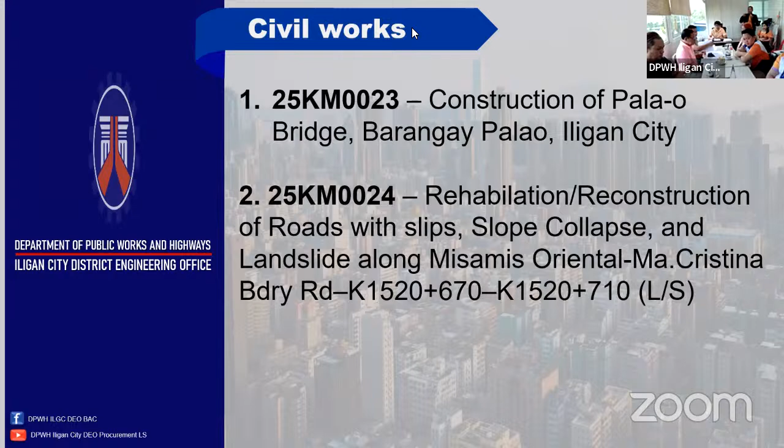Now, we will discuss the eligibility requirements, financial and technical. Sir Muammar, please. Yes. Okay, good morning. Let's review the eligibility requirements: Class A documents, legal documents. Technical documents: statement of all ongoing and similar completed government and private contracts, valid PCAB license and registration for the type and cost of the contract to bid, construction safety and health program, statement of single largest completed contract.

First, a contract shall be considered similar to the contract to be bid if it has the same major categories of work. Please refer to Department Order number 117, series of 2017, revised guidelines for the determination of major and similar categories of work.

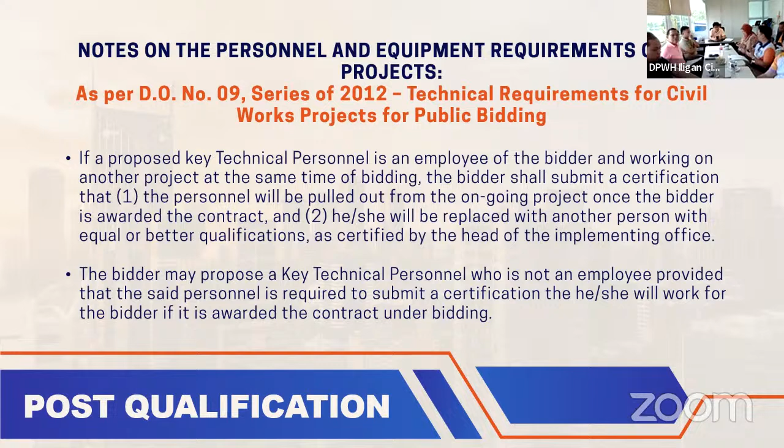This certificate shall be included in the first envelope of the sealed bid. Also to be verified during post-qualification is the said equipment pledged by the bidder. The bidder should specify in the submitted bid the location of the equipment where they can be inspected. If any equipment is not in the specified location, then the bidder shall be post-disqualified.

Contract award. The contract shall be awarded to the bidder whose bid has been determined to be the lowest calculated and responsive bid as a result of the detailed evaluation and post-qualification conducted. The successful bidder shall be notified through the issuance of notice of award within the bid validity period and must be confirmed by the successful bidder in writing within 2 days upon receipt thereof.

Some common errors in the submission of bids. First, incomplete pages of bid documents, technical and financial. Second, authority of the signatory to sign on behalf of the bidder. Single proprietor: signatory should be the owner proprietor only. Corporation or cooperative: board secretary certificate and board resolution. For the joint venture: resolution or agreement. For the partnership: as indicated in the articles of partnership.

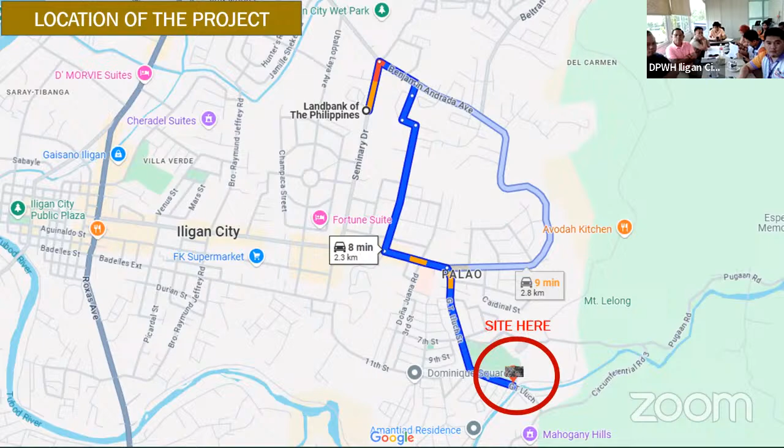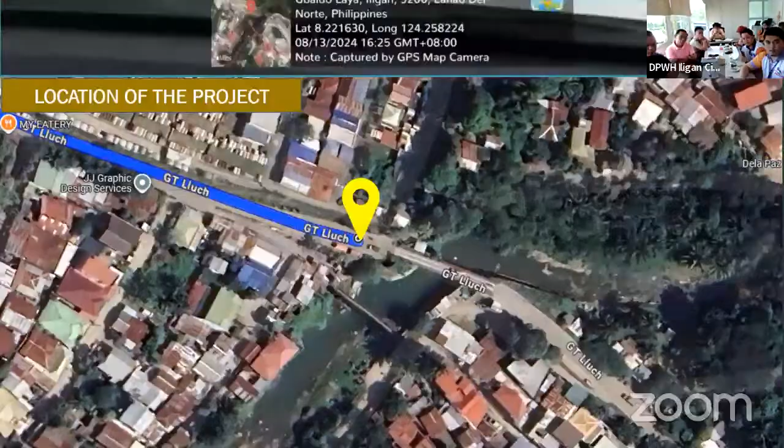As for the project description, the project involves construction of one span PSCG bridge with RC pile driven foundation. The length will be 40 meters. The project duration is 289 calendar days. The project also includes provision of field office for the engineer, rental basis. For the scope of works, under Part A, facilities for the engineer, we have provision of field office for the engineer, rental basis. For Part B, other general requirements, we have project billboard / signboard and another project billboard / signboard. These two items have different sizes, that's why they are separated.

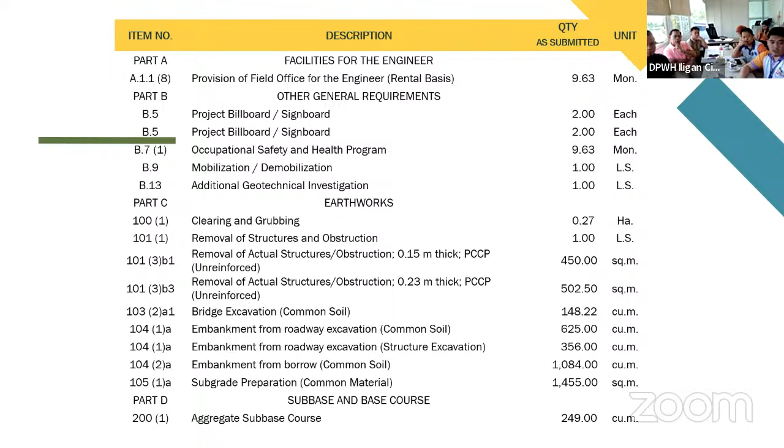And for Part E, we have surface course. First is Portland cement concrete pavement, unreinforced, 0.15 meters thick, 14 days. We also have Portland cement concrete pavement, unreinforced, 0.28 meters thick, 14 days.

For Part F, bridge construction, we have precast concrete piles furnished, 450 by 450 mm, type C. Precast concrete piles driven. Test piles furnished and driven, 450 by 450 mm. Concrete railing, standard. Reinforcing steel grade 40. Reinforcing steel grade 60. Structural concrete class A, 27.58 MPa, 28 days.

Pre-stressed structural concrete members, type 6 I-girders, lean concrete class B 16.5 MPa, paint for concrete structures, elastomeric bearing pads, expansion joint, steel finger type. Then for Part G, drainage and slope protection structures, stone masonry. For Part H, miscellaneous structures, we have reflectorized thermoplastic pavement markings, white, and reflectorized thermoplastic pavement markings, yellow.

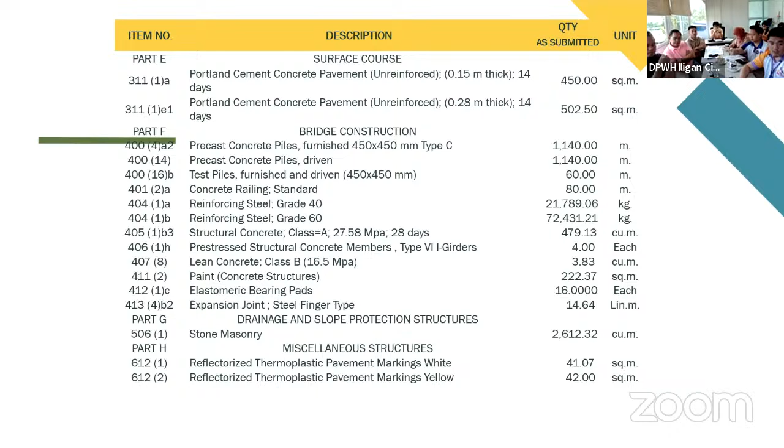And now for the minimum equipment requirements. First, we have dump truck, payloader, bulldozer DX175, horsepower of 167, backhoe with breaker, 0.80 cubic meter, chainsaw, 9 inches standard blade, motorized road grader, 140 horsepower, G710A, vibratory roller, 10 metric tons,

SD100DC, water truck / pump, 16,000 liters, transit mixer, concrete vibrator, concrete batching plant, concrete screeder, concrete saw, 14-inch blade diameter, bar cutter single phase, bar cutter 3-phase 36 diameter maximum, joint sealer machine, truck mounted crane with 41 to 45 metric tons, diesel hammer 7,500 kilogram meter,

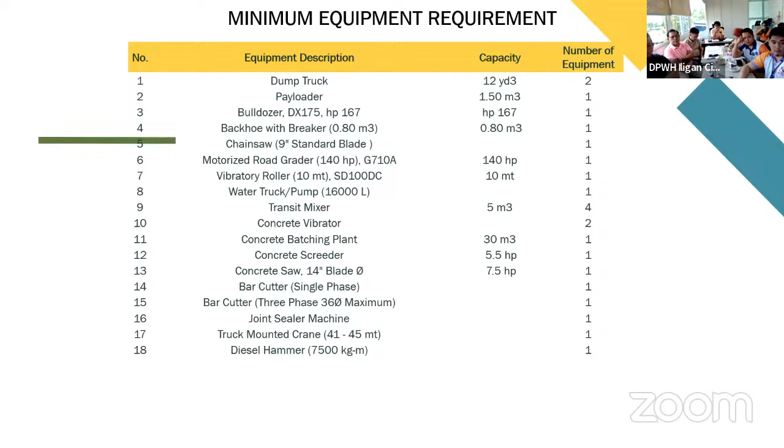and drop hammer, cutting outfit, jackhammer, bar bender, crawler crane with bucket, 1-bagger mixer, wood / steel ladder, cargo / service truck, generator set, welding machine, 500 amperes, electric driven, grouting machine, crawler crane, dolly, backhoe wheel mounted, vibro hammer, water pump, 100 mm suction diameter, cargo / service truck, applicator machine, kneading machine, material testing equipment / apparatus

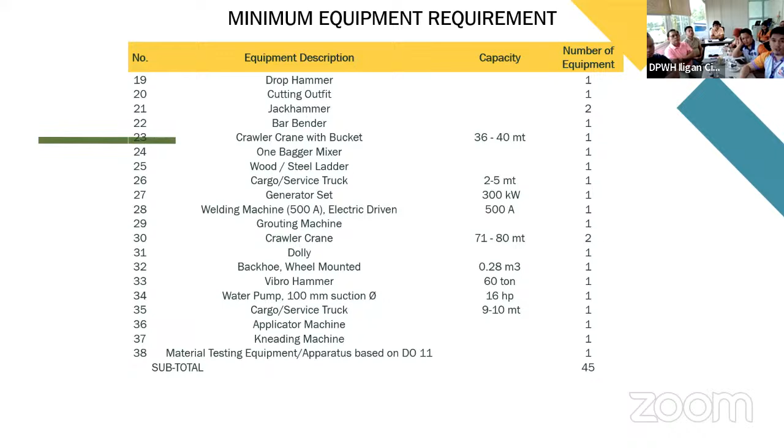based on DO 11, with a subtotal of 45 equipments. This project has an approved budget for the contract of 47,040,000 pesos only.

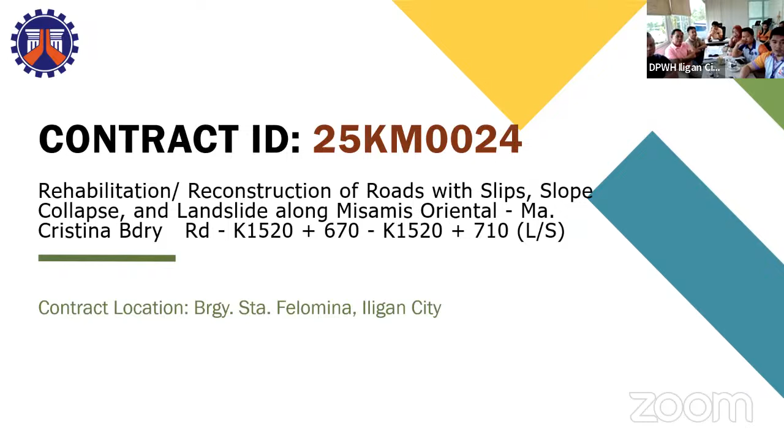For the second contract, with contract ID of 25 KM 0024, entitled Rehabilitation / Reconstruction of Roads with Slips, Slope Collapse, and Landslide along Misamis Oriental-Maria Cristina Bdry Rd, K1520+670 to K1520+710, left side. Contract location is at Barangay Santa Felomina, Iligan City. So this one shows the location of the project, which is roughly 3.9 kilometers from our office.

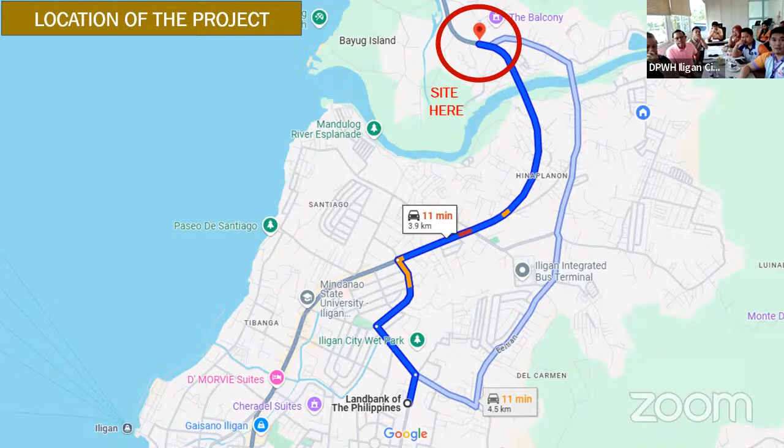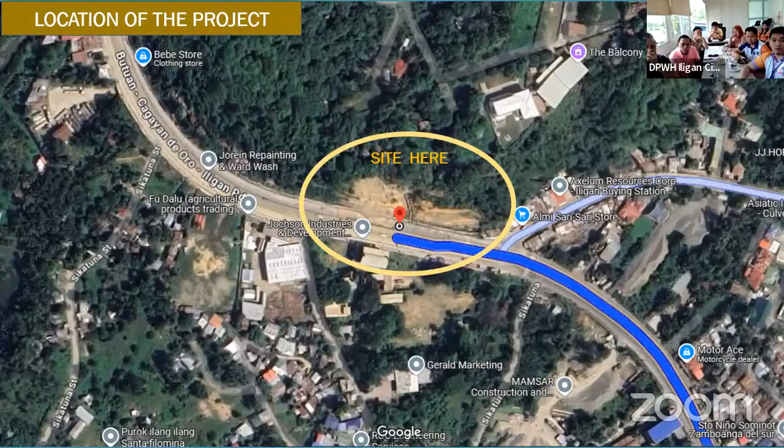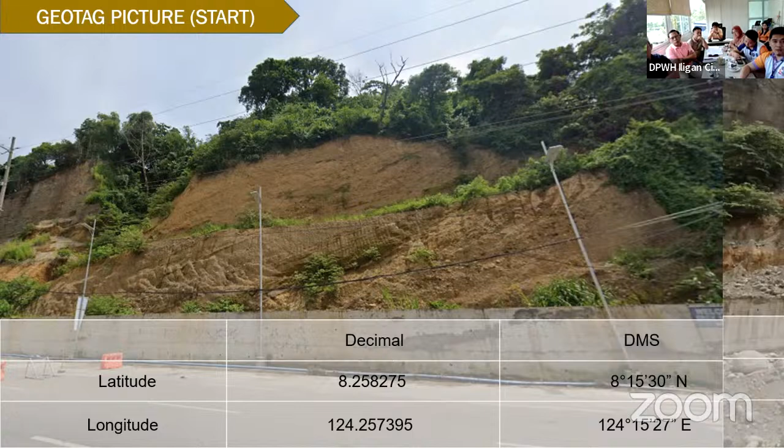And this map shows the closer top view of the site location. This photo is a geotagged picture showing the starting point of the project, while this one shows a geotagged picture of the end point of the project.

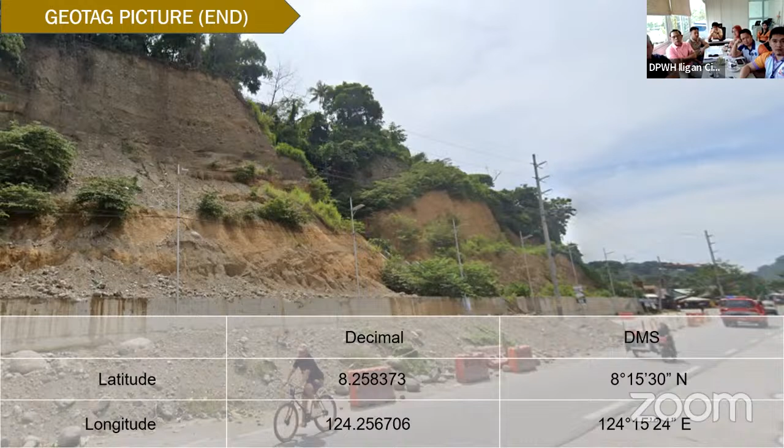As for the project description, this involves construction of a passive simple drapery wire mesh system with a length of 40 meters. It also includes coco-net, vegetation, with a project duration of 175 calendar days. This project also includes facilities for the engineer.

For the scope of works of this project, for Part A, facilities for the engineer, construction of field office for the engineer. Part B, under other general requirements, we have project billboard / signboard, occupational safety and health program, traffic management, mobilization / demobilization, additional geotechnical investigation. For Part C, under earthworks, we have clearing and grubbing, structure excavation, common soil.

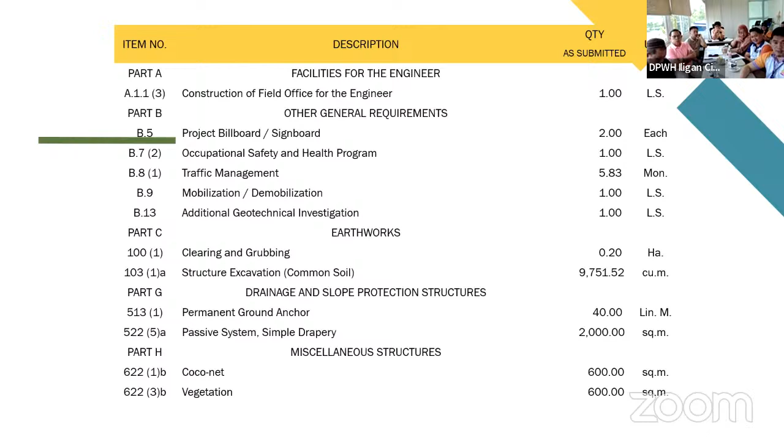For Part G, under drainage and slope protection structures, we have permanent ground anchor, passive system, simple drapery. For Part H, under miscellaneous structures, we have coco-net, vegetation.

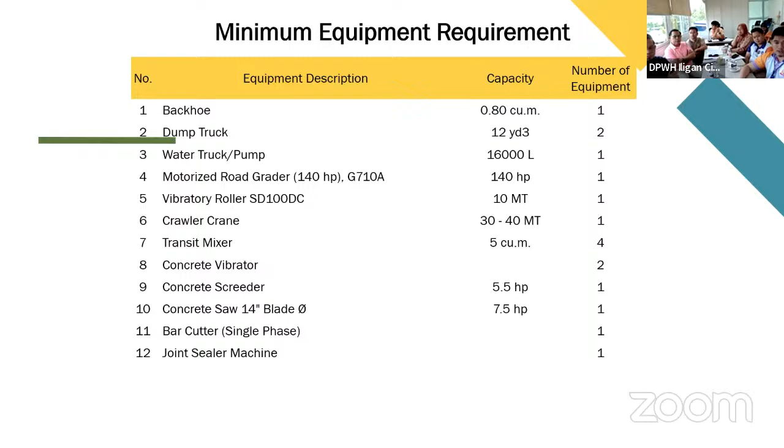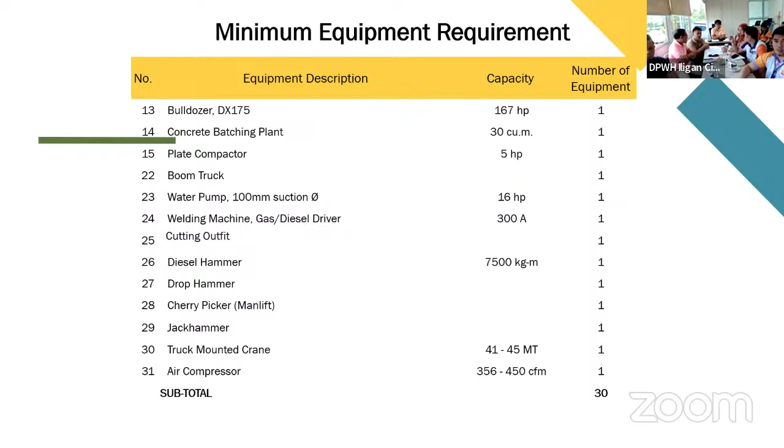bulldozer DX175, concrete batching plant, plate compactor, boom truck, water pump 100 mm diameter suction, welding machine, gas / diesel driven, cutting outfit, diesel hammer, drop hammer, cherry picker or man lift, jackhammer, truck mounted crane, air compressor, with a subtotal of 30 equipments. This project has an approved budget for the contract of 24,500,000 pesos only.

Thank you, Mr. Chair. Thank you, Engineer Moy from BAC. Any clarification? If none, what is the pleasure of everybody? Anyone to move to adjourn this activity? I move to adjourn this pre-bid conference, Mr. Chair. It has been moved by Sir Alvin, seconded by Sir Laios. Now the pre-bid conference is adjourned. Thank you.